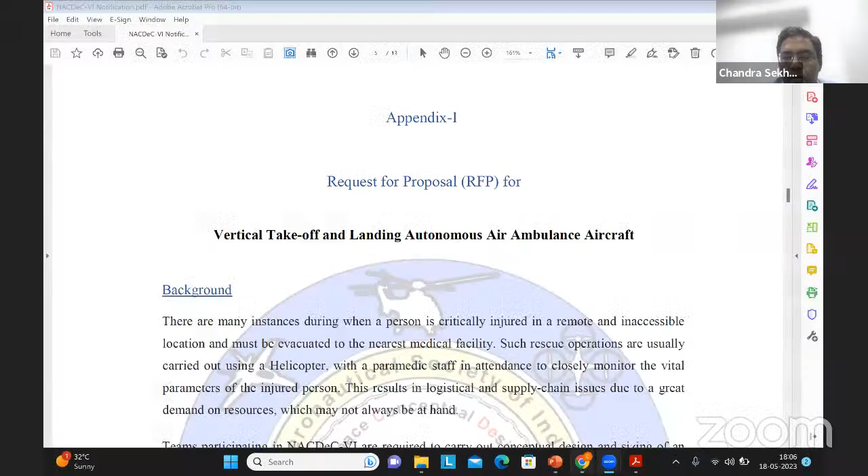Okay. First of all, let me share my screen. Then, where is the screen share button? Yes. I think you can all see my screen now. Yes, screen is visible.

So first, let me just say that this webinar is not going to be about some particular design. There are two things that I want to clarify right at the beginning. There is a design and there is the design. Now, what is the difference? The difference is, as a structural engineer, I can always design anything I want. I can design an aircraft also. All of you, with your basic structural engineering knowledge, given some information, can design anything you want.

But that may not necessarily get certified and be allowed to fly or operate anywhere in the real world by the authorities. The one that will be allowed to do that is the design, because that design is going to satisfy all the certification requirements and standards prescribed by professional bodies or government agencies. So there are two aspects to design. One is the general design approach: given a problem statement, how do I go about designing something? After we do this, the second problem is, can we get this design certified by the required agencies or authorities? That is a separate problem.

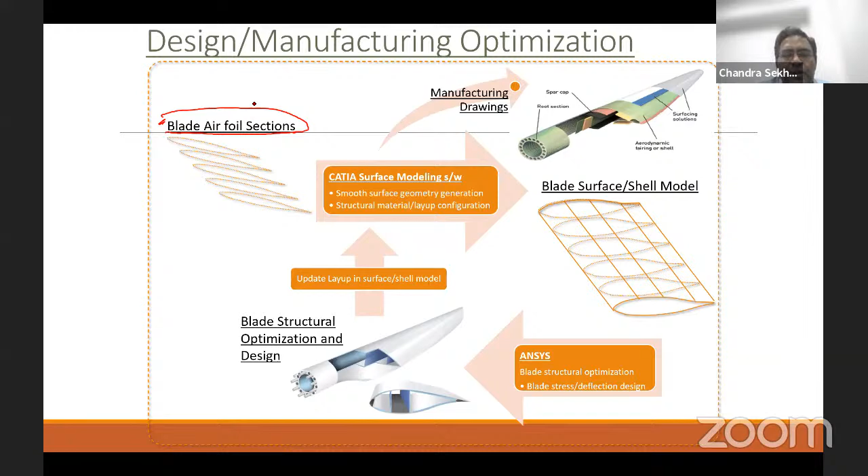But it happens rarely, because most of the time there is a close integration, but it is required. It is not something that happens by default. That integration has to be done in a deliberate manner by the design team, so that the manufacturing team is also incorporated into the design loop, so that they are aware of what's going to happen and their inputs are also going into the design. So once this is done, then the part is made and it goes into the field as a product. So this is a really high level loop of design and manufacturing.

Now, coming to your particular problem, this air ambulance problem that has been given, we can see that it has got this kind of mission profile and some of the specs on the mass of patient, paramedic, the kind of range, cruise speed, cabin volume, and all these are given. I just took this from the problem statement document on the website. So this is the problem that all of you are looking at. Now, I'm assuming all of you have already done quite a bit of work on this and come up with some configurations and all that.

Now, the key part is how do you get to make it? There are two approaches to make this. One is do it empirically, make some part, try it out. If it doesn't break, it's okay, so we use it. But that kind of design technically is not a design as such, because it's an empirical thing. It will be as good as it is until its first failure. Because every time you make it fly, you don't know whether you are breaking the envelope of its design, because there is no design envelope as such originally thought by the designer.

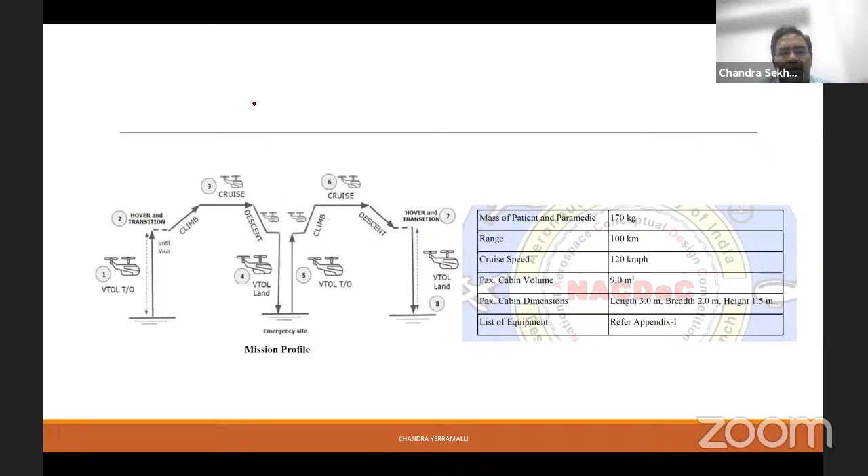Many times, actually, when people don't know the formal analysis techniques and how to go about approaching the design, people tend to do it in this gut feeling fashion. We make something, we try it out. If it fails, we reinforce that particular failed part, and we keep on doing like that. And somehow the last one that works, we stick to it. And nothing wrong in that, but it's just that it is not really a technical design. It's as if somebody who doesn't know any basic engineering has done that work. As long as it flies, I guess it's okay. But we'll try to see if we can do it in a better way.

So I'm assuming all of you are mechanical or civil or aerospace engineers. So all of you have done basic strength of materials and basic mechanics of materials and some solid mechanics or FEM courses. And all of you are familiar with CAD modeling and all that. I'm assuming that. So first thing is, what is the difference between analysis and design?

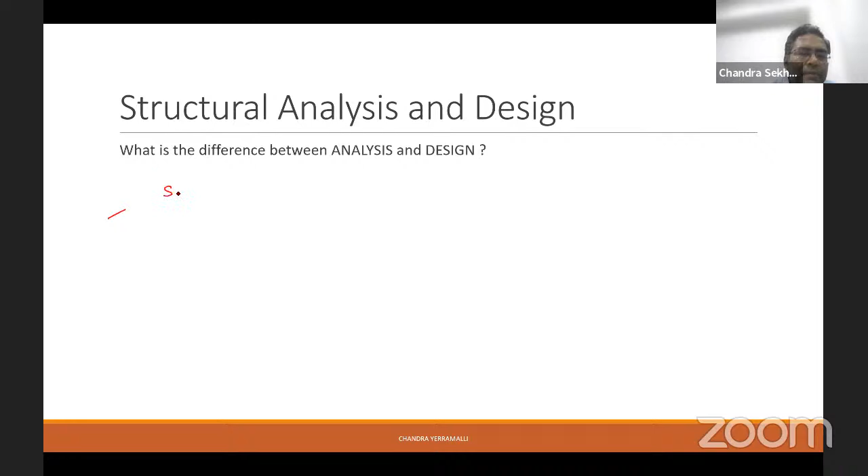Most of you have done a lot of analysis courses: strength of materials, finite element analysis, finite element methods. All these are basically where the problem is given and we have to solve it. So, cantilever beam problem: the problem is given to us. There is a cantilever beam of so much length, so much dimensions, material properties are given, the load is given, the load application point is given, and then we are asked, what is the deflection in this beam? And we go about solving it.

Now, design is different. Design is, can you design a cantilever beam which can take so much load at this location, and its deflection should not be more than so much, X magnitude, mm, or whatever. Nobody has given you anything else. This is an English language problem that has been given to us. So now, as an engineer, we basically have a white paper and only whatever we know, and we have to come up with a cantilever beam that will satisfy the requirements as posed by the end user. Okay, so that is a design. So design basically is the problem where we create something which will satisfy the requirements of the end user.

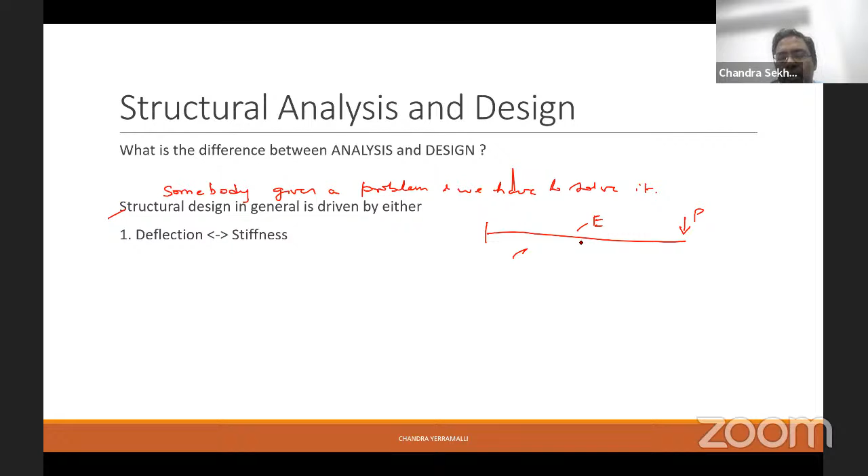So if this is a cantilever beam and I put a load P, and let's assume I have taken a material of modulus E and moment of inertia I, my deflection at the tip is PL cubed by 3EI. When I apply this load, the beam will deflect, and at the tip it will be the maximum. Now suppose I say that my cantilever beam has a maximum allowable deflection, which I'll draw slightly lower than what has happened. This I'll call delta allow.

Now, if delta is greater than delta allow for the first iteration of my cantilever design problem, and this is again iteration based, I have assumed something, because in the design problem nothing is given to us. I'm going to assume a material system, take an I value, apply the load, compute the deflection, and I get a delta which is greater than the allowable deflection. Then I am limited by my delta.

So now I'll do one more iteration where I will change either E or I or both. I can do anything. See, as a designer, we have absolute freedom. So I'll change one of these or both, and then I'll see that delta is less or equal to delta allowable, so that I am within the allowable deflection.

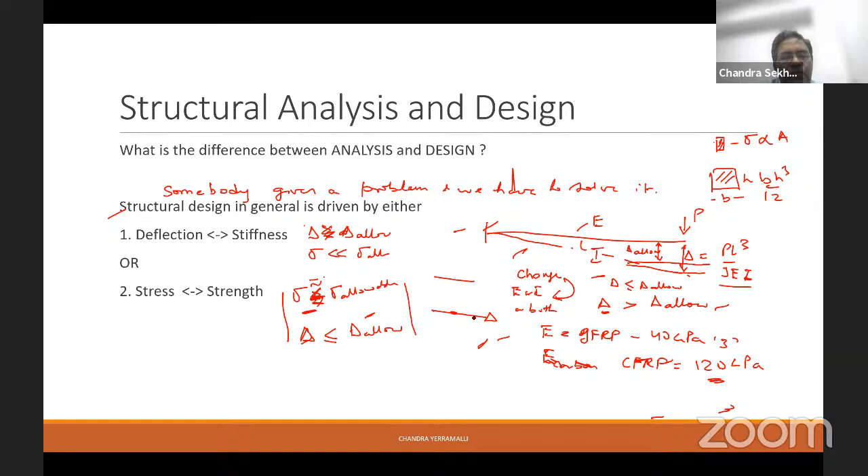Okay, so these are the two key things that you have to keep in mind when you're designing any structure. And in your case also, the first thing you should check is this. What is your limiting thing? What is driving it? The thing that is limiting basically becomes your driver, because that is what will force you to change the design. Okay, then the next part is, I sort of went ahead and told this, but I wanted this point to be clear: deflection and stress limits.

But the most important part in any structure is the loads, because ultimately the whole structure is being designed so that it can resist the loads that are being applied. Now, load itself is not a simple thing. It's not like your problems where somebody tells you P equal to 100 Newton and you apply it. In reality, getting loads itself is a huge process. In case of aircraft design or these kinds of designs, you will have a V-n diagram from which you can get the load factors, and from there you can apply loads.

Loads in these kinds of things come in various conditions like takeoff, cruise, accelerated flight, extreme gust, unsymmetric loading. Say you have a quadcopter and one propeller stops working, or three propellers stop working. What kind of imbalance is going to happen there? Or say you are suddenly accelerating only two of the propellers; unsymmetrically there will be some type of imbalance, so moments will be generated. You may not have to do all these things in this particular design competition, but these are all the different types of scenarios in which loads can be generated.

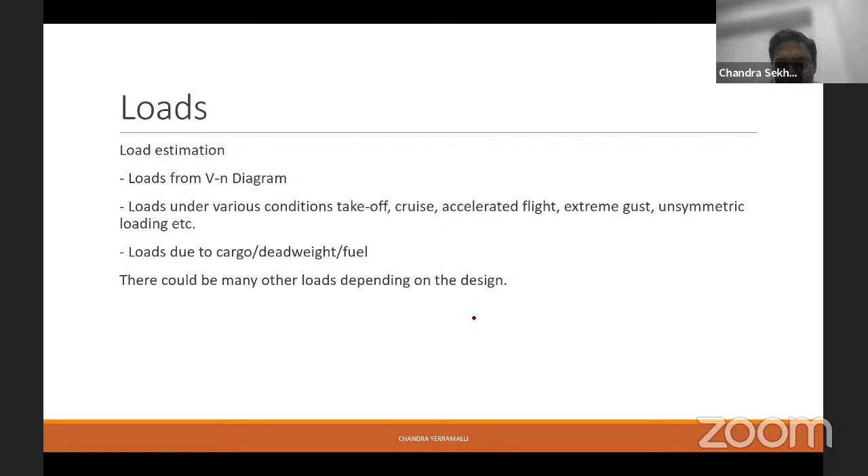And also then the loads due to cargo, whatever you're carrying, the dead weight of the structure, which is the self-weight, fuel, or in this case batteries; all these things also become loads for the particular frame. Then there could be other loads also. In this case it may not be required, but you might have to account for electrical, lightning strike type of situations. It's not a load in the conventional sense, but it has to be taken care of by the structure. The structure should be able to withstand the strike. So there could be other things.

So the other thing is that we are always used to thinking about loads as this load is acting, that load is acting, but in reality many of these loads will act independently or in unison. They could be coming in a combined case, which will lead to different load cases. So one has to think about these load cases. In many situations, if you do a Google search or some reading, you will find there are already some load cases defined. If not, you can think on your own: what combinations can lead to a disastrous situation where the loads will be more than when they act independently? And one could look for those cases.

You can define them for yourself, because ultimately somebody has done this job before us, so we might find a report somewhere. But if nothing is there, then it is our job as a designer to think about those situations where multiple loads can act together and create a detrimental situation. So that has to be done. As a designer, that is our job.

Now, the other situation is repetitive loads. This whole takeoff, cruise, land, again takeoff, cruise, land, you can think of as one load cycle. This load cycle, if repeated many times, can lead to something called fatigue loads, basically cyclic loads. The stress itself may not be very high, nothing near the breaking stress or failure stress of a material. But even a small stress, if repeated over a long time, can make the material fail, and that is called fatigue failure.

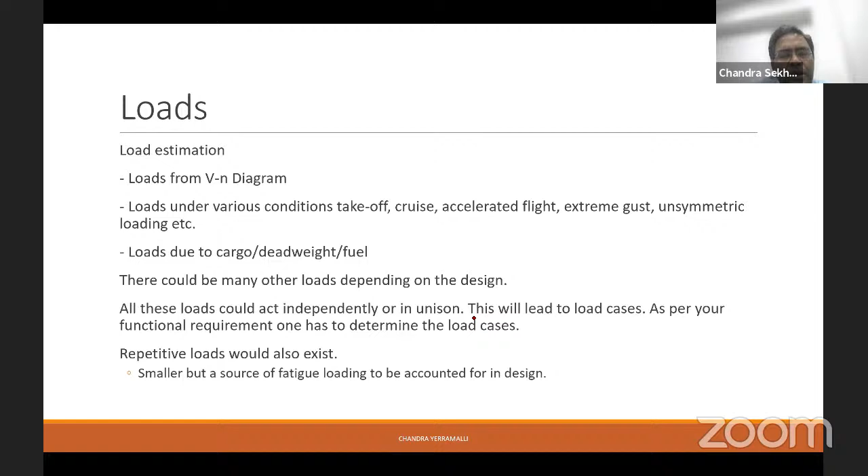So this also has to be accounted for in design typically. Now, these are all the different loads that one should account for in the design process. Okay. Then the second part that has to be looked into is the materials aspect. See, material is another most important thing.

If you think about design as a triangle of, say, what is the functionality that you're looking for, then the other two would be the loads that are going to act, and the third is the materials with which this particular function will be achieved, material and geometry. So material selection is again driven by the function. What kind of function are we looking for? What is the functionality of the product, what is the end user requirement and all that.

Then the other issue is, we think about some material, but suppose we don't have the manufacturing skill or we don't have access to that material. Maybe we cannot purchase that material. We may not be able to get it in time, whatever; access to resources could be an issue.

Then the third issue that drives material selection is cost. Materials are usually the most costly part of the whole structure because that is what makes the structure. And so if you want to get a specific material, it might be expensive. So cost is also a driver. So choice and access to the right material system is key to a successful design. Many times it is the bottleneck in the design.

For example, nowadays modern fighter aircraft are made with carbon composites, but we don't make carbon fibers in our country. So we need to import. If somebody doesn't sell us the carbon fiber, our design process will be stuck. In the same way, there are some specialty ceramics which we don't have access to or cannot make. Then we have to get it again. So what happens then? All your paper design will be put to a full stop if that right material system is not available to us.

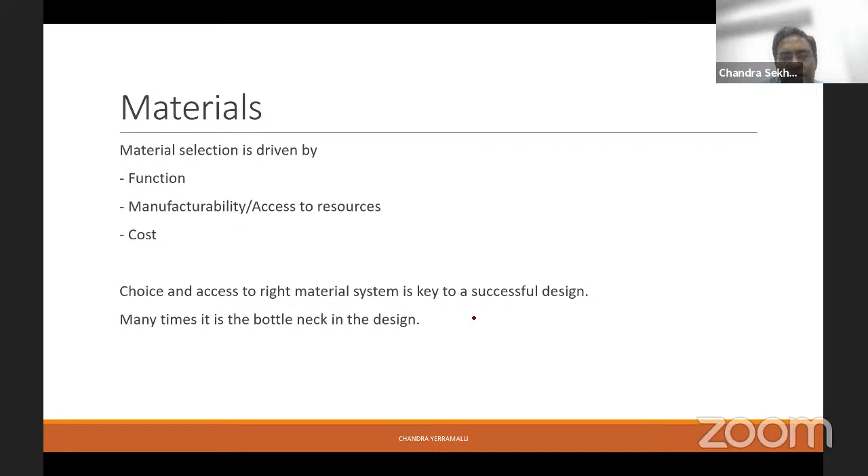So make sure that you make the right selection of materials. And before you do that, you check for availability, accessibility, manufacturability, and also from a functional requirement point of view, whether this material system will satisfy cost, etc. Okay. So that is the second aspect, which is very important to the design. Then the third aspect is the analysis and design tools.

So I'm assuming all of you will have access to CAD modeling software and finite element analysis software. And the most important thing is that all of you are technically proficient engineers with an understanding of the basics of engineering, because all these softwares will be of no use if you cannot figure out what to do and how to do it. And basic things you should always be checking yourself. Whatever software we use, it is only going to give us what we have input to the system.

If our inputs are wrong, say units mismatch: typically when you look online, you will find material properties given in various units. Loads you will get in some other units. And if you are not doing the conversion properly, you are solving a problem which is nobody's problem. Okay. So make sure these kinds of things don't happen, because in reality, it actually happened.

Lockheed Martin sent a probe. It was a NASA Lockheed Martin venture, I think. They sent a probe to Mars, or actually not Mars, maybe some other one of those outer bodies. And the probe, I think, crashed into that planet or moon or whichever one they sent it to. Later on, during a post-mortem analysis of the failure, they realized that there was a unit mismatch. NASA worked in the SI system and Lockheed Martin worked in the old FPS system. Somewhere they made a mistake and they didn't convert.

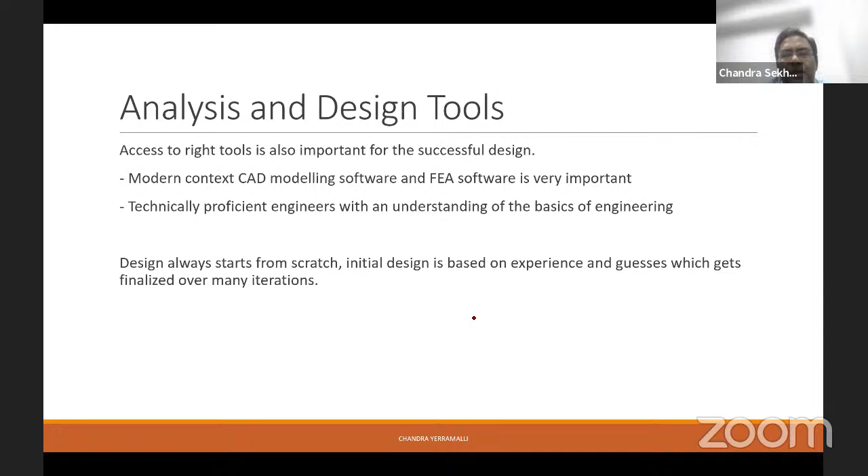And again, as I said, design always starts from scratch. So initial design, you have to start with a guess, and that will be finalized over many iterations. So the steps, I would say, are: one, identify your design objectives. Second, choose the right material system. Identify the loads and estimate the loads. Perform simulations with some geometry, whatever guess you have, and materials, and apply the loads. Then safety factors is actually another important thing.

I think I missed that part in the slide. So safety factor is required on both material properties as well as on the loads. So let's talk about material properties. All of you know how we get material properties. We do testing of coupons in a lab. So when we test, say, hundreds of samples, we will get some strength and some variation. So all the tested curves will not be the same. Basically we have a band. So we have a lower bound and an upper bound for the modulus. And similarly, we will have something for sigma y.

So now, if we look at these distributions, there will be some distribution for modulus. Now, depending on the confidence level up to which you want to design, for example, 6 sigma design means you are going 6 standard deviations away. So that means the failure chance you're taking is extremely low, like 1 in a million times. So your safety factor will then be decided based on that.

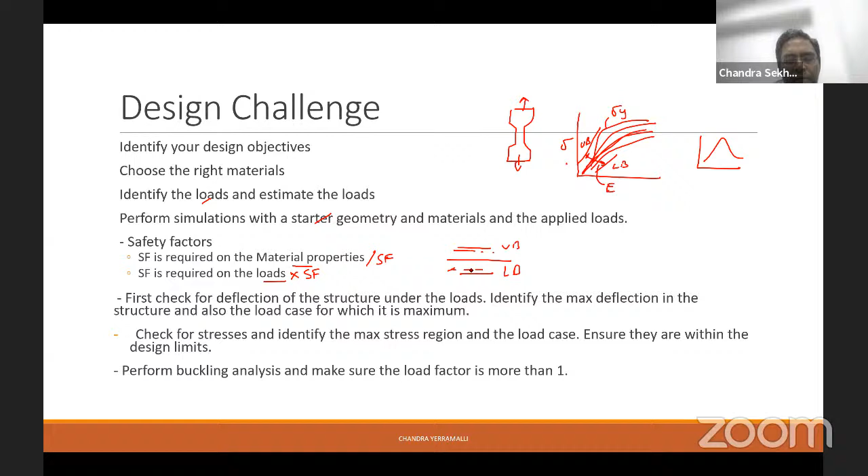Then in the design, you check for deflection of the structure under the loads, identify the max deflection, and make sure that you also keep track of which load case it turned out to be maximum for. Then check for stresses and identify the maximum stress region and the load case. So basically there could be an iteration between these two, because we would have started off with some geometry and tried different geometries till we reach a situation where deflection is within the allowable limit.

And if the deflection is within the allowable limit, then we go for checking stresses. And if stress is also within the allowable limit, then great. If not, then I have to go back again and change the geometry so that I get my stress also within the limits. And once that is done, the final structural check that has to be done is for buckling, because everything could be correct from a stress and deflection point of view, but there could be thin members or thin plates in a structure which can actually undergo buckling under the applied load.

So buckling analysis also has to be done, a linear buckling analysis, and then you can identify the load factor. Make sure that your load factor is more than 1, typically 1.25. But in this case also, if you want to apply a safety factor, then the modulus could be degraded here.

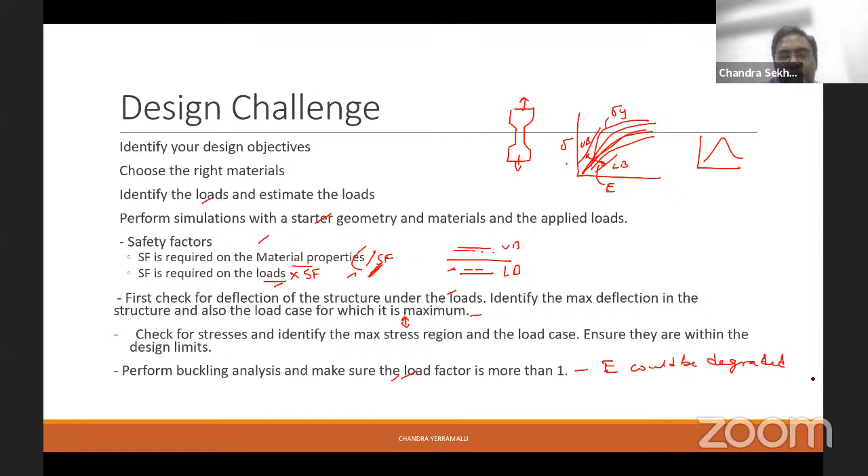So again, that's a choice you can decide based on your material properties. You can degrade it by say 10% or 15% and do the buckling analysis and make sure that the load factor is more than 1. So basically these are the 3 key things: deflection, stress, and buckling. Other things will be covered pretty much under this. So that is the really short and fast wrap on how to go about a general design approach.

The other thing, if you have some specific things like you're cutting some composite material somewhere in the middle or making a big cutout for something, then it is better if you do some quick analysis of that detailed geometry under the applied loads. But again, since this will be more of a preliminary design document, it may not be required, but this is something that you should keep in mind, that if you're doing something really specific in the main structural frame, if you're cutting this or putting some attachment, then it is better to do a quick check on that to make sure that it's not creating additional problems in the structure.